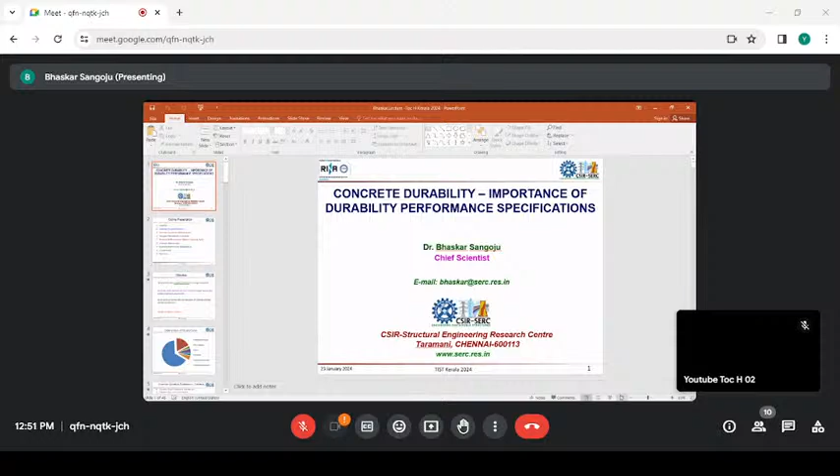Please put full screen. Slideshow. This is full screen. Sir, in slideshow mode, please click on view option.

Sir, near that home, in that row, last one view. Yes, sir, okay, slideshow. Slideshow from beginning, sir, from beginning. Fine, yes sir, but now it's not in slideshow mode.

Can you click one? Can you please click one more from beginning? From beginning I clicked. Yes sir, not, so it is not in full screen. No sir.

View. Normal. No. Okay. Please click on slideshow only. Now I am just clicking fit to window. No, no, click. So here I am getting full slide, sir.

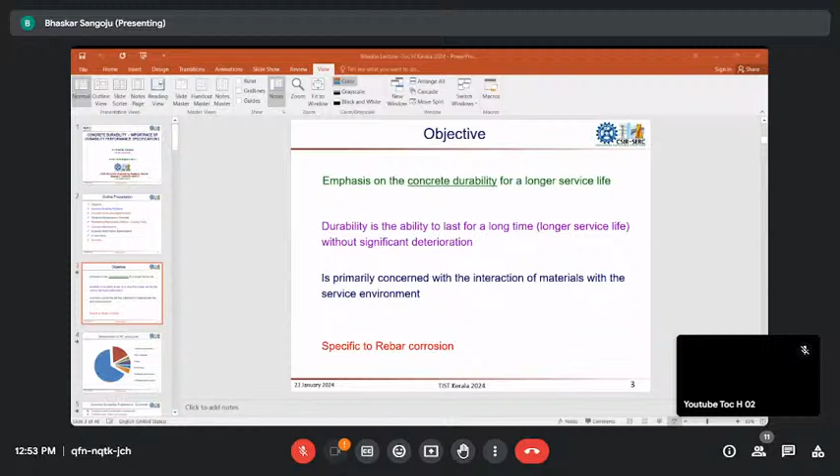Sir, in that orange row, that file home, insert, in that slideshow, from current slide, from current slide. Clicked, at least can you see the text? Yes sir. Now common durability problems in concrete. Yes sir, and now concrete construction specifications.

Yes sir, but then why it is not showing in full screen? On my system, it is showing full screen. Oh okay sir. Then I will log in once again. Maybe it's my phone problem.

I don't know. Pardon sir? For everyone it is like that only, ma'am. So what do you mean? You want me to continue this way or you want me to log out?

Actually you can do another, one more option is there. View, there is full slideshow, one option is there. Let Sahi ma'am come once again, I will tell, she will instruct you, sir.

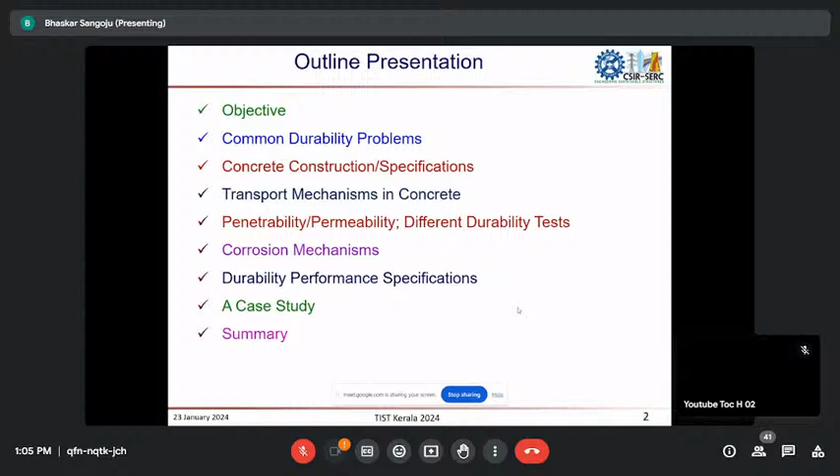Regarding durability performance specifications, as I mentioned, despite following some specifications and guidelines, we are not able to control the deterioration of concrete structures exposed to aggressive or surrounding environments. So we may need additional specifications to address durability issues, like quality control of cover concrete and required cover thickness. For that, I will show one case study, and finally I will summarize my presentation.

So the main objective is emphasis on concrete durability for a longer service life. We talk about durability and durable material many times; even in day-to-day life we use this word. So what exactly is the meaning of durability?

It is the ability of concrete to last for a longer time without significant deterioration. It is very common that deterioration happens when concrete is subjected to and interacts with the surrounding environment, but that deterioration should remain within certain limits till its design life.

That means without significant deterioration, the structure survives for its design life or intended life. That is what is durability.

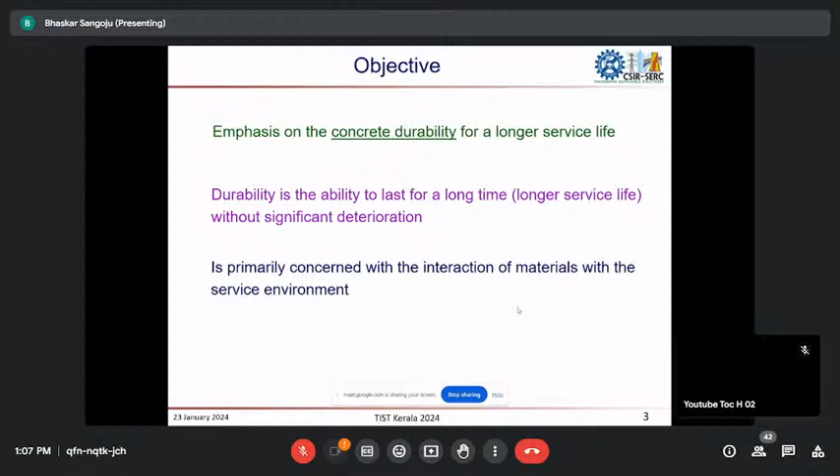Durability is primarily concerned with the interaction of materials, in particular concrete, with the surrounding service environment. Whether it is a carbonated environment, chloride environment, industrial environment, or a water retaining structure subjected to complete water exposure, that is the environment we should look into.

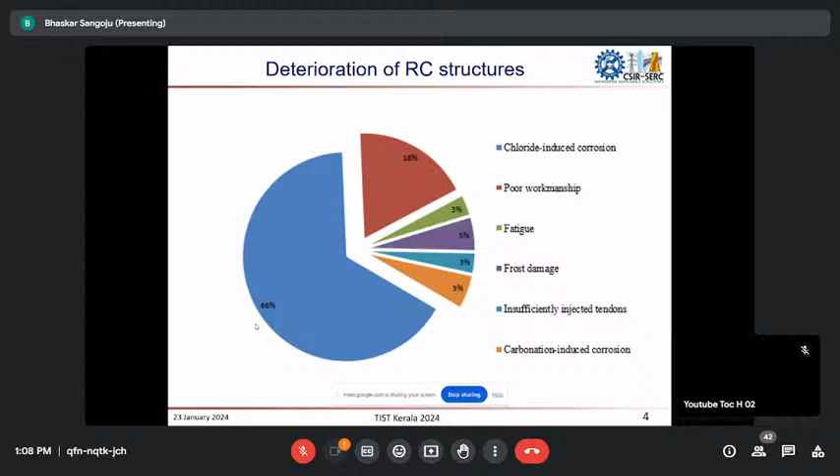My talk will be specific to rebar corrosion, because if you see this pie chart, most of the literature reports that especially in reinforced concrete structures, nearly 65 to 70% of structures deteriorate mainly from corrosion of rebars, whether chloride induced or carbonation induced. Though it is embedded inside the concrete, how does the rebar corrode? That is the main focus of this presentation.

These are some of the common durability problems: corrosion of steel in reinforced concrete, sulfate attack if the surrounding environment or groundwater contains sulfates causing the concrete to deteriorate, alkali aggregate reaction, and freeze-thaw cycle damage. These are some common durability issues when we talk about concrete.

But for all these durability problems, the deteriorating agent has to enter inside the concrete and react with the hydration products of concrete. That means it has to enter through the cover concrete, whether it is chloride, carbon dioxide, or sulfate—penetration of the deteriorating agents available in the outside environment.

In addition, the deterioration mechanism needs the presence of moisture or water. Most of the time, the presence of moisture is essential, whatever the deterioration—whether chloride induced corrosion, carbon dioxide induced corrosion, or sulfate attack. So the durability or penetrability of concrete plays an important role, which is why I use the word penetrability, penetration, or permeability. All these lead to the durability of concrete.

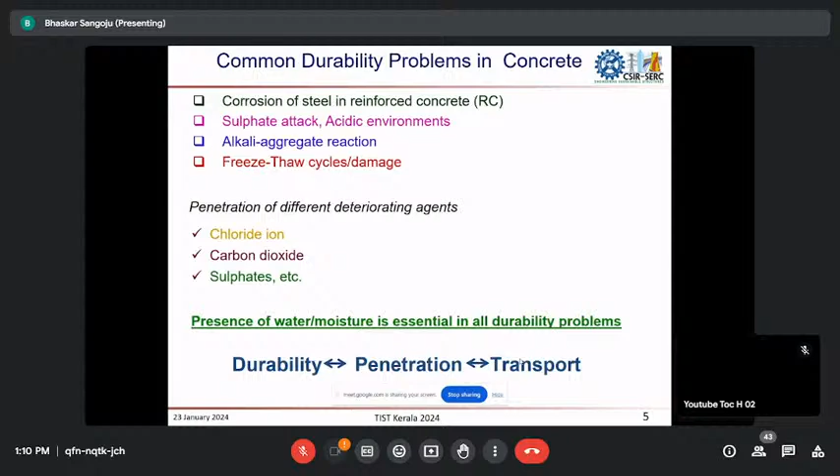The durability or penetration relates to the transport properties of concrete, particularly the transport properties of cover concrete, because that acts as a barrier to avoid entry of these deteriorating agents. But as of now, we follow design guidelines like IS 456 or design of concrete structures by limit state method, and some specifications—prescriptive specifications.

For example, water cement ratio you fix to keep the concrete of good quality and get the grade or strength of concrete you want. For durability issues, like shrinkage and temperature effects, minimum cement content and maximum water cement ratio, grade of concrete—we define and design the concrete as per these prescriptive specifications.

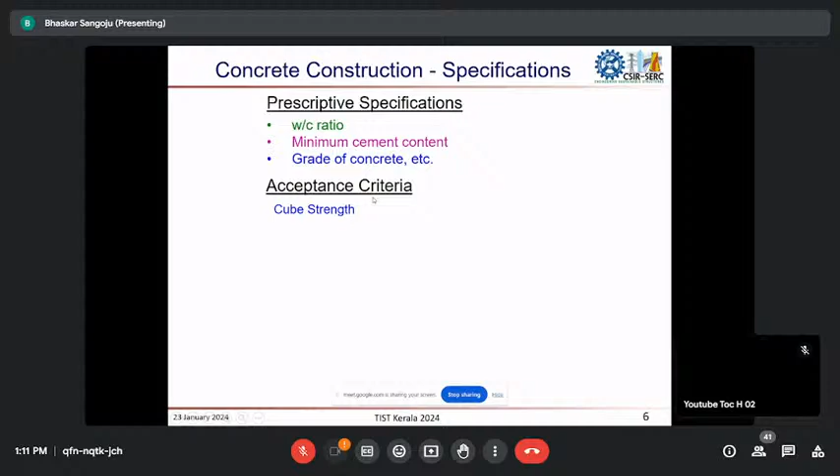At the end, what we follow as acceptance criteria is cube strength at 28 days, on standard cubes cast in the laboratory and cured for 28 days. Prior to that, during casting, we take utmost care for compaction, consolidation, and curing, and that we take as the acceptance criteria.

But is it truly representing the concrete available on the actual structure, the as-built concrete structure? That is where the gap comes in and durability issues arise. One of the main reasons for deterioration is inadequate acceptance criteria—cube strength alone is not sufficient. We may have to bring in other parameters to be followed and ensured either during mix design or after construction of the structure.

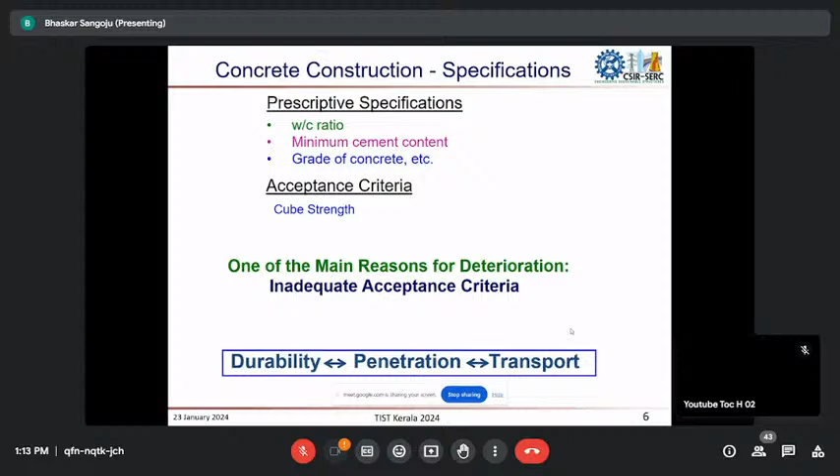Those parameters have to ensure the impermeability of concrete or the penetration resistance of the concrete, so the transport mechanism of concrete comes into picture. In addition to cube strength, we may have to bring one or two parameters which evaluate the transport properties of concrete. If we keep those transport parameters to a limit, that means the concrete should not exceed this limit, then it can perform well.

So before that, what are the transport mechanisms that we should know? Most of the deterioration mechanisms like carbonation, rebar corrosion, leaching, etc. are related to the ease with which the fluid or ion can move through the concrete. The primary mechanisms involved in fluid or ion movement are: one is capillary action, that is sorption.

As we know, many plants take water from the ground because of capillary action, so that is sorption. Next is fluid flow under pressure, that we call permeation. The third one is flow under a concentration gradient, we say that is diffusion.

Chemically, if the chloride concentration is more, for example, the chlorides try to move from a higher concentrated area to a lower concentrated area through diffusion. The fourth one is movement due to an applied electric field, this is migration, mostly the ionic flow or electron flow. Most of the time this mechanism is seen in laboratory experiments where we go for accelerated tests.

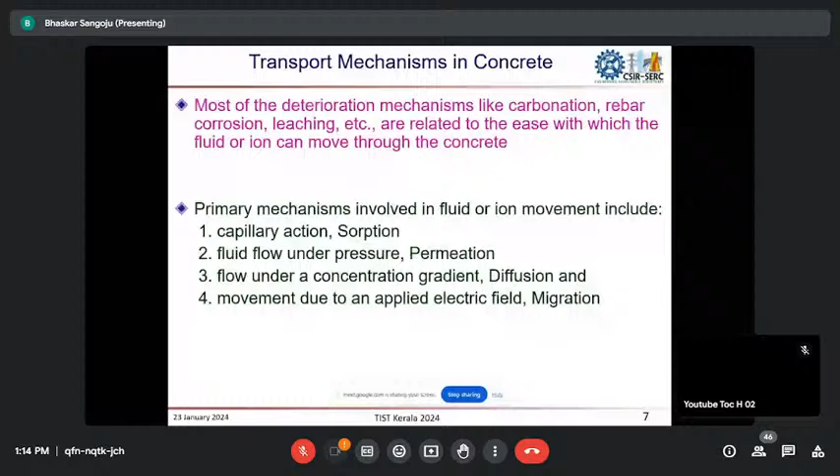Sorption refers to uptake of liquids into a solid by capillary suction. It is measured using parameters such as bulk absorption and sorptivity. There are some standard procedures available - maybe some of you have already started working on this in the laboratory.

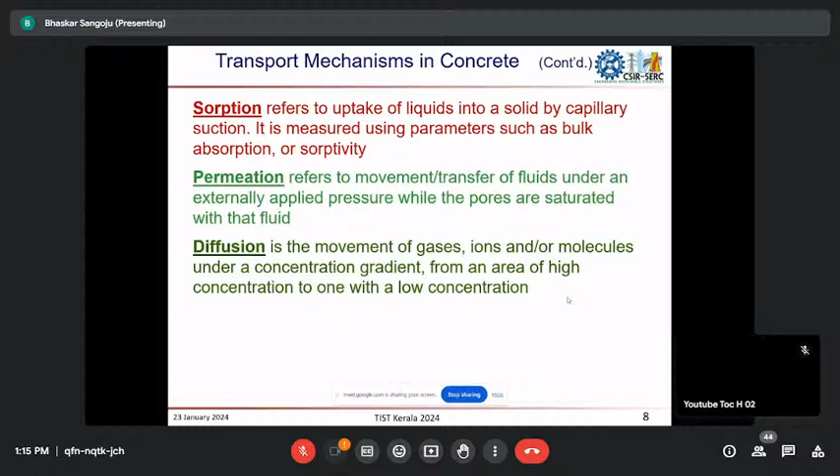Permeation refers to fluids moving under an external applied pressure, and diffusion is the movement of gases or ions under a concentration gradient from an area of high concentration to low concentration. Migration is as I already told. So essentially what we are looking for is to ensure impermeable concrete, impermeable cover concrete in particular.

So permeability is what we are going to measure. There are different durability tests. I'm just giving the list: for water penetrability, sorptivity test, water permeability test as per DIN 1048 and Germann. For chloride permeability, nowadays people are using the rapid chloride permeability test as per ASTM C1202, and the accelerated chloride migration test, which has two varieties - steady state and non-steady state, with Nordic standards available: NT Build 355, NT Build 492.

And bulk diffusion test - here the specimen is exposed to a pool of water for longer durations, and the other one is salt ponding test, exclusively for evaluating the chloride permeability of concrete.

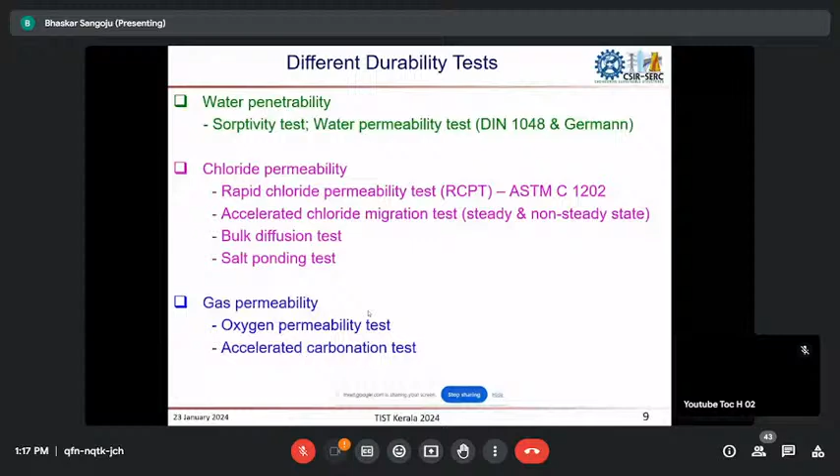Similarly for gas permeability, where you want to know the gas resistance of concrete - air resistance or oxygen - because for corrosion to initiate, the presence of oxygen is also important. If there is no oxygen, the corrosion reaction or corrosion progress will not take place. So to know the oxygen permeability of concrete or the carbonation diffusion coefficient, these two tests are being used.

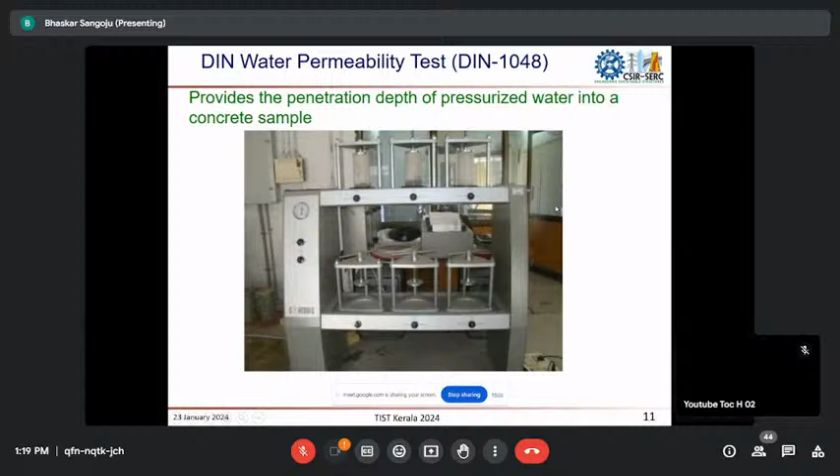You can see here the water pressure, and the specimen will be subjected to this water pressure for 72 hours. Once the test duration is over, the specimen will be taken out and split into two halves, and then we measure the penetration depth.

That gives the water penetration depth, which indirectly gives the permeability of concrete. So you can relatively evaluate the penetration depth of concrete. If the penetration depth is less, then we say that the concrete is less permeable.

This is another test, the Germann water permeability test. The advantage of this is it can be used on site also, whereas the previous two tests are normally performed in the laboratory. This is the setup, and it can be fixed either on a horizontal surface or vertical surface, and a constant pressure will be maintained on the surface.

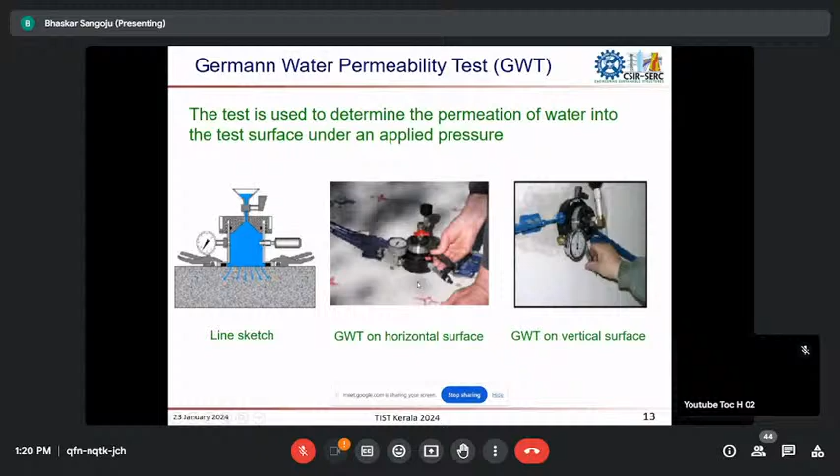The pressure loss, because of the permeation of water, will be adjusted using the micrometer screw, and based on that the flux or the water permeability rate will be calculated.

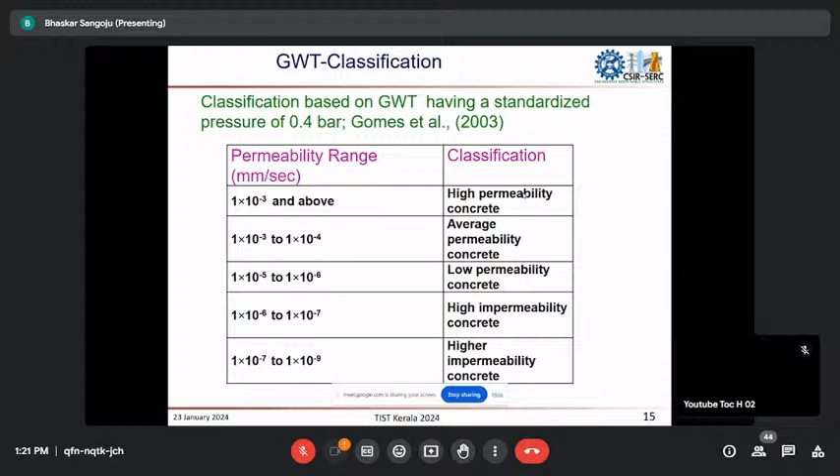This is the classification given or reported in the literature. If the permeability range is 1 into 10 power minus 3 and above, then it is said that the concrete is highly permeable. So all these tests are used to evaluate the relative performance in terms of ensuring the durability of concrete.

So in actual practice, we may have to use some of these durability tests while designing the concrete mix, as we do for evaluating the grades of different concretes. Here also, for the durability parameters, some classification we may have to give depending on our requirement, and then we try to evaluate these durability parameters.

A 15 mm depth is maintained for a duration of, say, 90 days or 60 days, whatever it is. But if the concrete has a very low water-cement ratio, then you have to expose it for more days. This is more similar to natural exposure conditions, so it takes more time for the chlorides to penetrate inside the concrete.

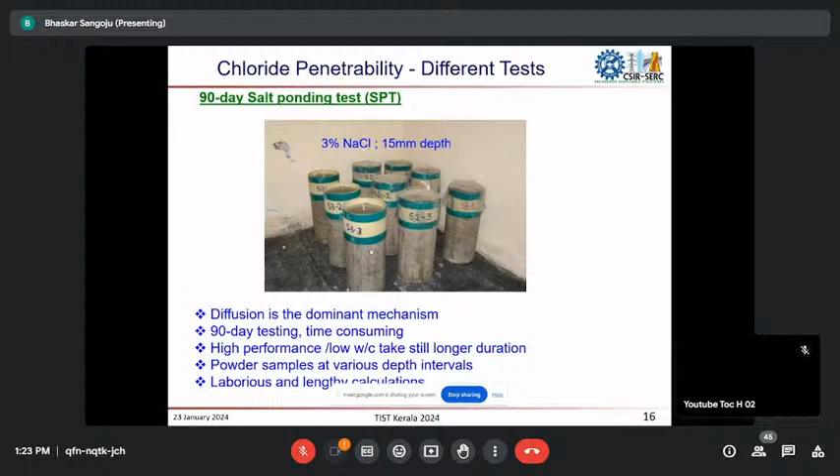High performance, low water-cement ratio concrete still takes more time for even a small amount of chlorides to enter the concrete, say 5 mm or 6 mm. Once the exposure period is over, we take the sample, clean the surface, and slice the top surface at different thicknesses, say 1 mm, 2 mm, 3 mm, depending on the requirement, to draw the chloride profile or evaluate the diffusion coefficient.

As I said, that takes more time for the permeation of chlorides inside the concrete. That is why an accelerated test, the rapid chloride permeability test, has come out. This is a 6-hour duration test, and this is the specimen setup: the concrete specimen placed between two reservoirs.

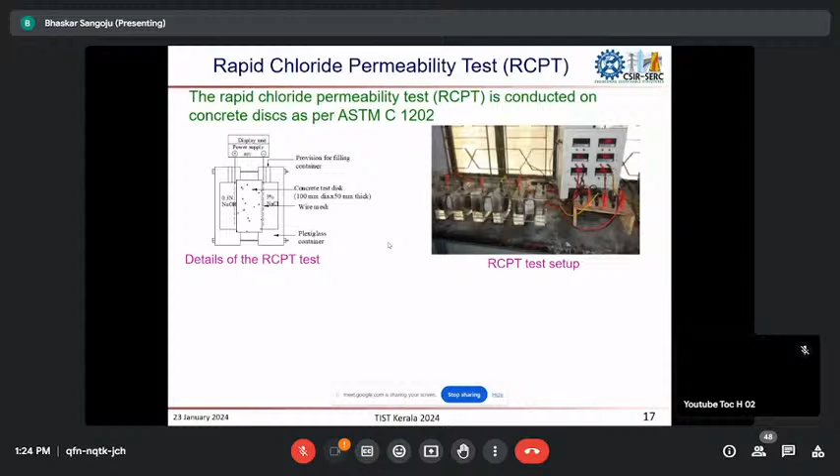One reservoir has 0.3 normality sodium hydroxide solution on one side, and 3% sodium chloride solution on the other side. Essentially, we impress a current so that the chloride ions try to move from one reservoir to the hydroxide reservoir. The chloride ions, being negative ions, try to move towards the positive side. We then find the amount of current passing, measured in terms of coulombs, ampere-seconds.

So this is the RCPT test setup. The total amount of charge passed is used to predict the chloride ion permeability.

The title says it is chloride ion permeability, but in concrete, because it is an accelerated test and we are impressing 60-volt current, sometimes the solution may get heated and the specimen also may get heated. So in addition to chloride ions, other ions available in the concrete pore solution also try to move and affect the total amount of charge passed. So strictly speaking, it is not only the chloride permeability test, it is just the amount of charge passed, because many other ions in the pore solution also contribute a little bit. Otherwise, for relative evaluations, we can very well use this RCPT test.

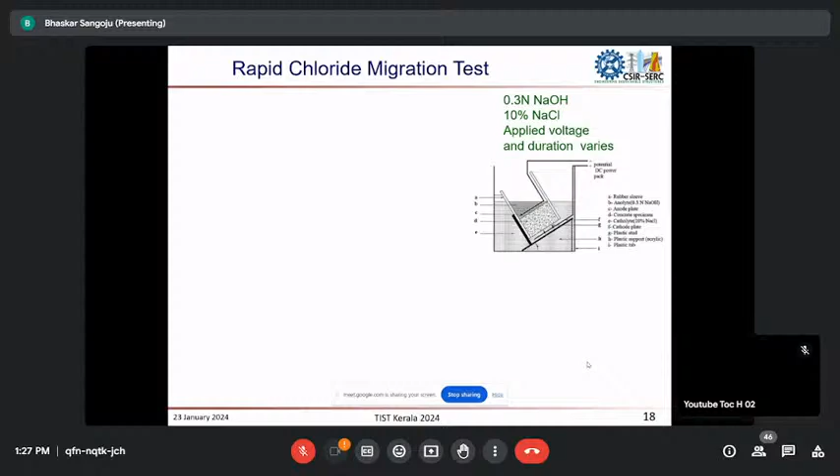Compared to the rapid chloride permeability test, the rapid chloride migration test is more reliable, because here we adjust the voltage with respect to the concrete property. So the voltage is not fixed and time duration also not fixed. Of course this is also an accelerated test, but we are not applying 60 volts here, whereas in RCPT we apply 60 volt current, so sometimes the specimen may get heated and other ions may try to move, affecting the total charge passed. That is not there here.

Also, if any chemical admixture is present in the concrete, this test gives a more reliable result compared to the previous RCPT test. That is why most researchers nowadays use the NT Build 492 test. The procedure here is similar.

This is the test specimen, 100 diameter by 50 thick, placed inside this inclined test setup. The inclination is intentionally created so that if the specimen is getting heated up, the air bubbles or whatever reaction takes place will be nullified.

Here the concrete resistance is being accounted for, so the applied voltage and test duration will be adjusted accordingly, and therefore the test results are less affected by the presence of admixtures.

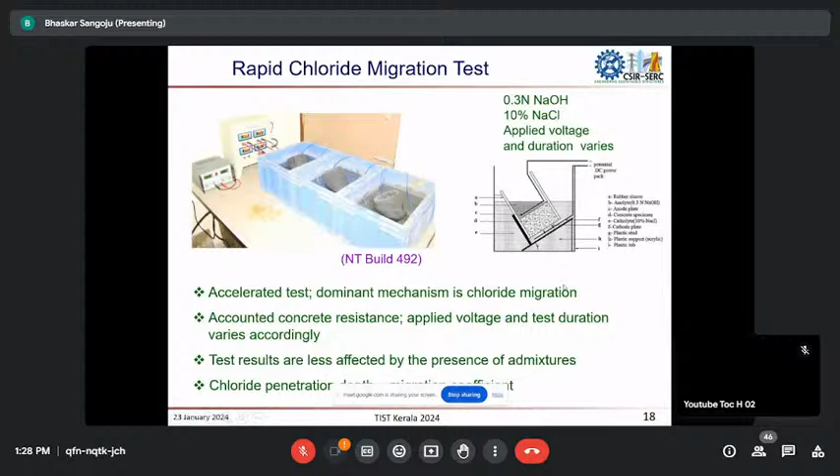Also, here we are not simply measuring the charge passed. Once the test duration is over, we take out the specimen, break it, and measure the chloride penetration depth alone. So this is more realistic compared to the RCPT.

The other one is the diffusion coefficient test. This is also similar to the RCPT test setup, but here we apply a very low voltage current, that is 12 volts. Depending on the concrete quality, this testing may take 2 days, 3 days, sometimes even 1 week, to get a reasonably good number of test points so that we can draw the diffusion line and based on that find the diffusion coefficient of the concrete.

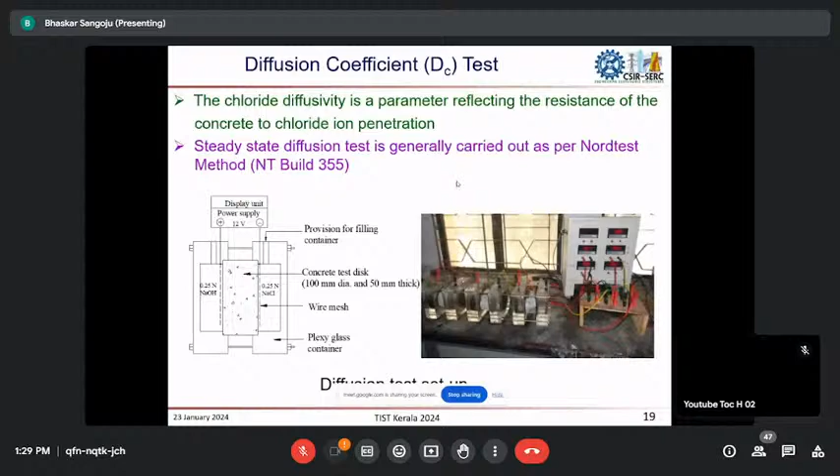Many researchers are using this diffusion coefficient as an important parameter in evaluating the service life, from the durability and corrosion deterioration point of view.

This is the oxygen permeability test, given by the South African standards. Here the oxygen permeability coefficient will be evaluated. This is a falling head permeameter test. The concrete sample is pressurized with oxygen to 100 kilopascal, and the pressure drop is monitored with time.

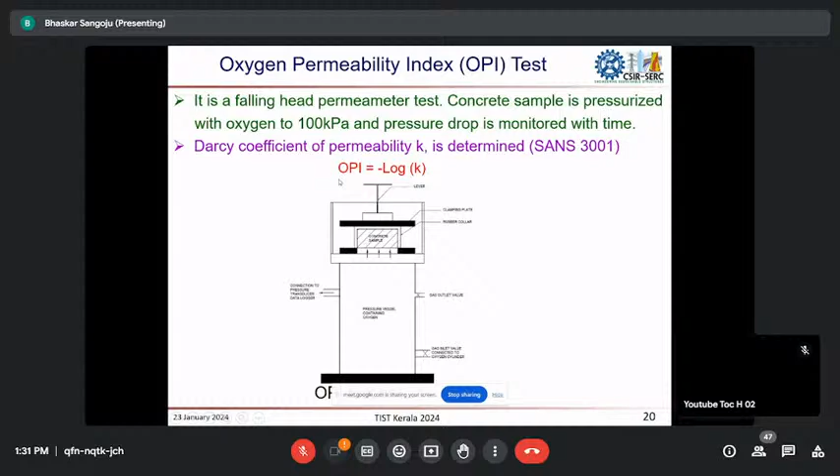This is the test setup, where the concrete specimen is placed. This is the pressure vessel containing oxygen, with an oxygen cylinder by the side. Oxygen is sent through the concrete sample, and we try to keep the pressure at 100 kilopascals. Because of the permeability and other factors, the pressure will get reduced, and that is taken into consideration to evaluate the oxygen permeability coefficient.

If we are aware of these tests, we give specifications for any big project or new construction, defining the grade of concrete in the design calculations, and we assume the concrete grade is achieved. But are we ensuring the grade of concrete on the as-built structure? That is very, very important.

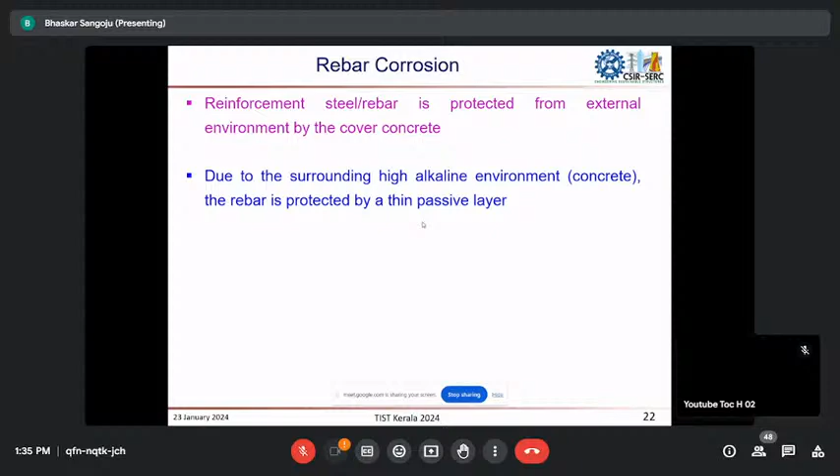The other protection is because the surrounding concrete is in a very high alkaline environment, the rebar will be protected by a thin passive layer formed over the reinforcement bar due to this high alkalinity. That layer protects the rebar from further corrosion.

But sometimes this passivation layer gets disturbed or damaged by a reduction in alkalinity due to carbonation or the presence of chloride ions, and then corrosion initiates. Corrosion is nothing but the interaction of the material with its surrounding environment. When concrete is exposed to aggressive environments, for example chlorides, the chlorides enter inside and damage this passive layer. Then corrosion initiates, and if the reaction is continuous, corrosion progresses.

To continue the reaction, as I said, I will show this in pictorial form as well—we need moisture and oxygen. So the parameters that influence the corrosion process are cover thickness, quality of concrete in the cover region (which is why we evaluate durability parameters), and the aggressiveness of the surrounding environment. These three are the major parameters that influence corrosion resistance performance.

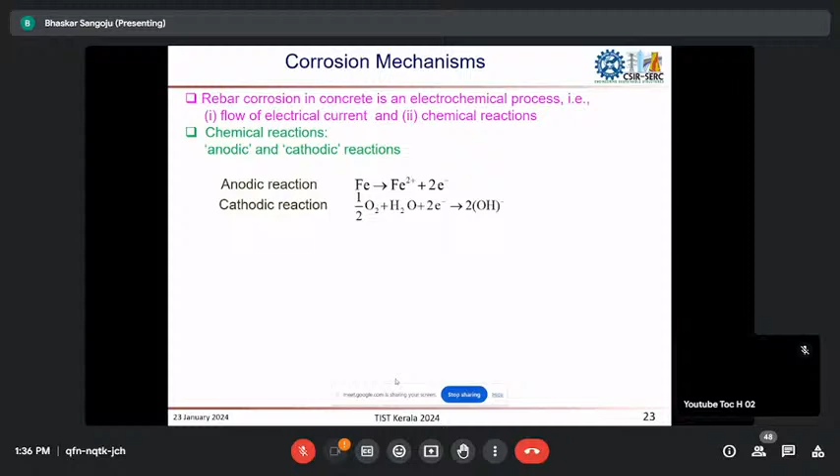So, the corrosion mechanism—as I said, rebar corrosion is an electrochemical process, meaning it involves the flow of electrical current and chemical reactions. These chemical reactions are anodic and cathodic reactions. At the anodic reaction, electrons are liberated, and at the cathodic reaction, that electron is consumed in the presence of oxygen and moisture.

And typical corrosion products, ferrous hydroxide, ferric hydroxide, and these products will again depend on the type of reinforcement bar and the surrounding environment, the aggressiveness of environment.

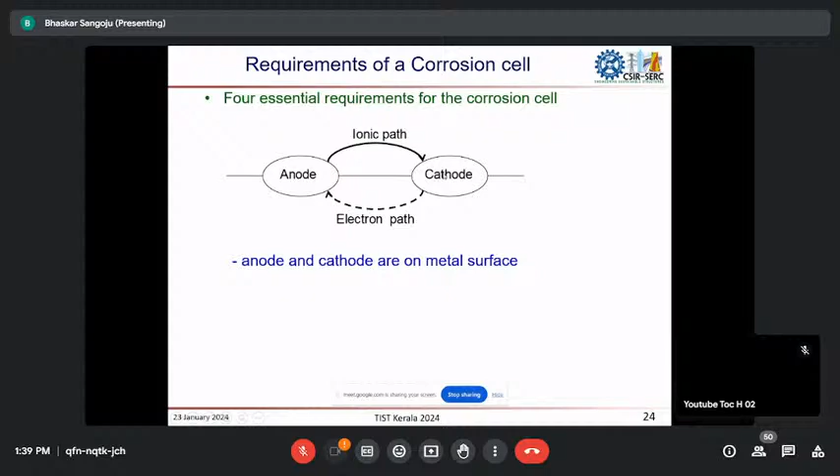Here, as I said, electrons and ions. Ions will be available in the pore water, whereas electrons means through the metal. So if there is a coupling or continuity or connectivity between anode and cathode, and presence of oxygen and moisture, the corrosion process will continue. Otherwise, there will not be any corrosion.

So that is why if we make the concrete more impermeable and there is no oxygen availability, we can very well protect the reinforced concrete structure from corrosion deterioration. Elimination of any of these four requirements stops the corrosion reaction, making the reinforcement bar better quality. That is why some people go for stainless steel, epoxy coated steel, and galvanized steel, thereby protecting the passive layer for longer durations.

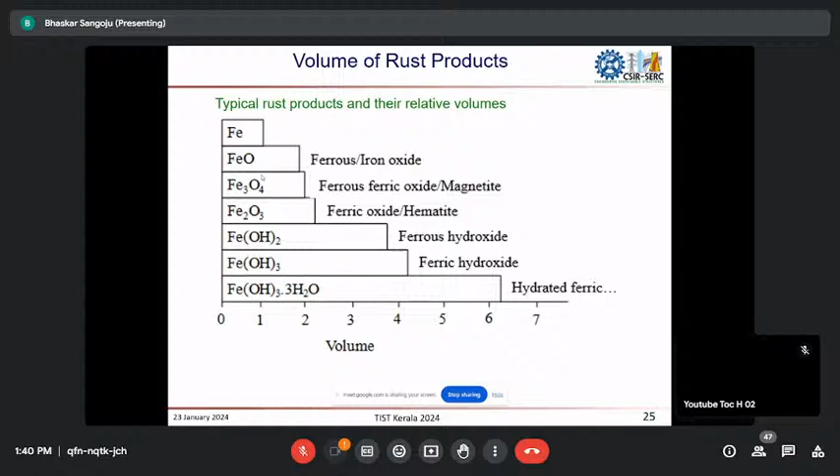And these are the rust products. Different rust products will have different volumes. Because of the increase in volume of the rust product, the rust tries to exert pressure on the outer concrete layer, thereby causing cracking, delamination, and spalling of concrete.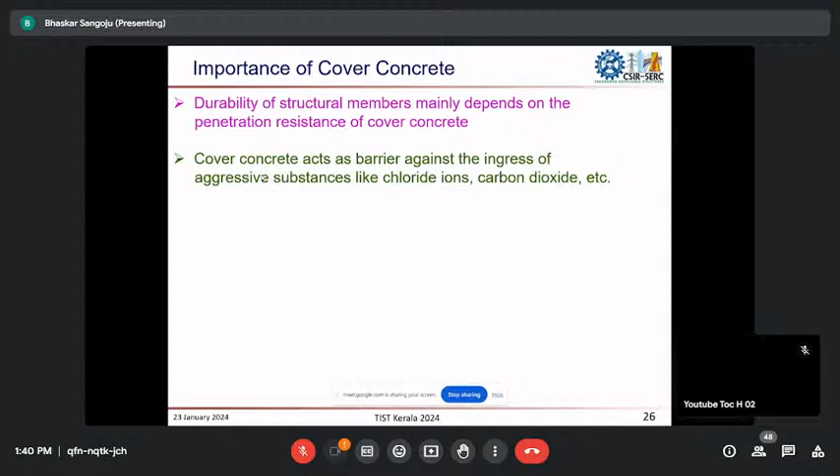So finally, you will see the exposure of rebar. That is why the cover concrete is very important for durability of the structural member, because it protects the reinforcement bar from the external environment, and also acts as a barrier so deteriorating agents cannot enter inside the concrete.

This can be seen in a simple line sketch, where the cover concrete plays a major role in protecting against outside deteriorating agents entering the core concrete. But from the design point of view, we essentially focus on the core concrete. By doing consolidation and compaction, we make sure the core concrete gains adequate strength, whereas the cover concrete we don't give that much importance. But from the durability point of view, we have to give equal importance to the cover concrete.

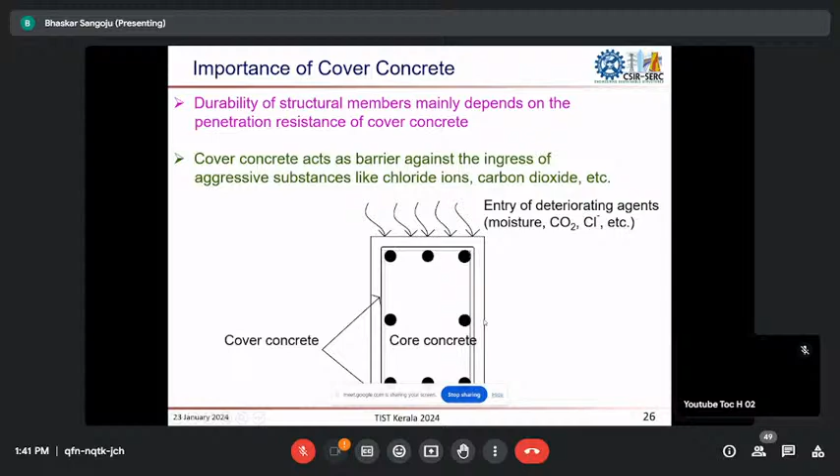To delay the cover corrosion process, you increase the cover thickness, but that increase cannot be without limit, because concrete is poor in tension. So whatever you provide as per the codal provision, make sure that the cover concrete is of good quality.

That is where the impermeability word comes into picture. If you make the concrete impermeable, indirectly you are increasing the resistivity of concrete from the electrochemical point of view. I'm talking about electrical resistivity because, as I said, corrosion is nothing but the flow of electrons and ions. So if we make the concrete impermeable, the ionic flow will get delayed.

So in this line sketch you can see the ions move from anode to cathode or vice versa through the concrete pore solution. If the pores are less interconnected, then the resistivity will be more, which means the permeability will be less.

As I said, the presence of oxygen and moisture is essential for corrosion to take place or continue. So if we make the concrete impermeable, we can take care of all these things, increasing the resistivity of concrete and minimizing the entry of deteriorating agents like chlorides or carbon dioxide, or the entry of oxygen and moisture.

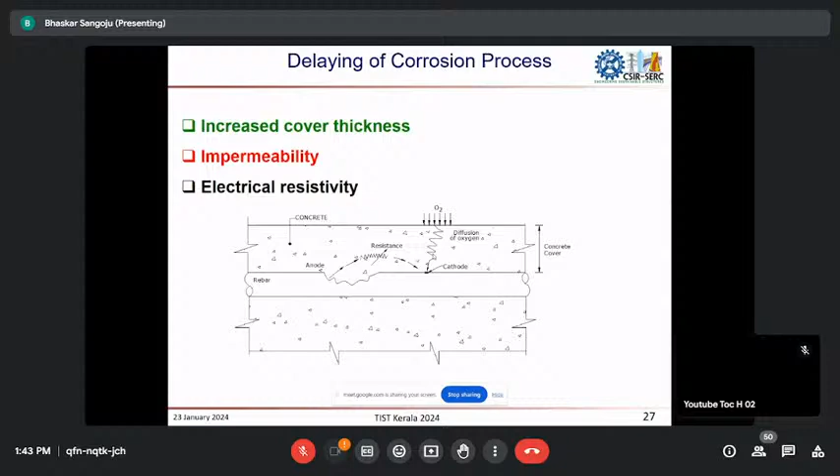So there are two major corrosion mechanisms: one is carbonation induced corrosion, the other is chloride induced corrosion. In carbonation induced corrosion, the outside carbon dioxide reacts with the water available in the concrete pores and becomes carbonic acid. So if we make the concrete impermeable with fewer voids, the water will not be available, whatever is required for the reaction or formation of carbonic acid.

So once the carbonic acid forms, that carbonic acid reacts with calcium hydroxide that is available as hydration products and then develops calcium carbonate, because this calcium carbonate is acidic in nature. Okay, and then the pH of the concrete will come down. Many of you may be knowing that concrete is a very alkaline material, very high alkaline.

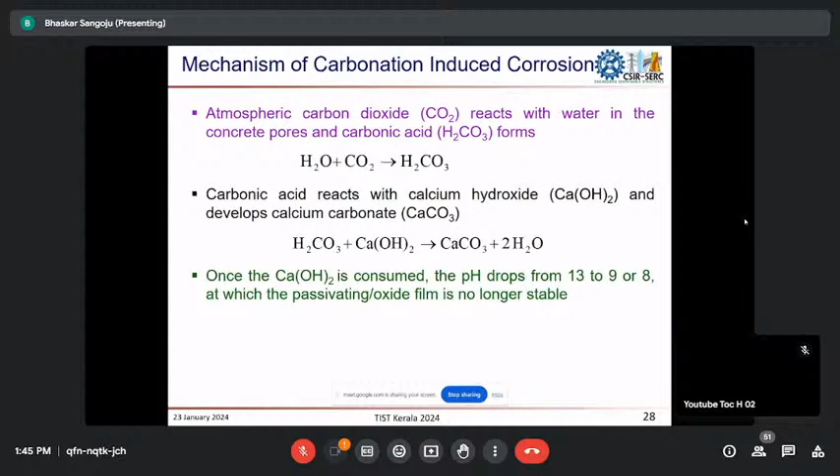So because of this carbonation, its pH will come down. So when it drops to 9 and below, then the passive layer, what I told earlier, will become destabilized, depassivated, and it will no longer be available for protection of the rebar. So this is the phenomena of carbonation induced corrosion.

That means when the concrete is exposed to industrial environment or carbon dioxide exposure conditions, the CO2 tries to enter inside the concrete and reacts with the concrete, and the pH drops down. You can see a more uniform type of rebar corrosion.

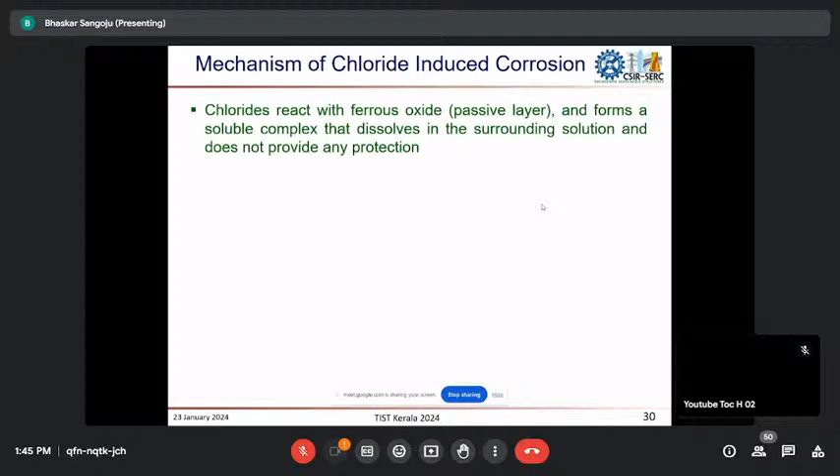But whereas in the case of chloride induced corrosion, it will not be like this. There, a pitting type localized corrosion we can see. So here in the chloride induced corrosion, this is the mechanism that is taking place.

So first chlorides react with ferrous oxide, that is the passive layer, and become ferrous chloride. This is soluble in pore solution. Then the passive layer will become unstable, depassivates, and corrosion of steel starts, and later formation of rust products.

So in the chloride-induced corrosion, it is more localized. Wherever the concentration of chlorides is more, there the rebar will get corroded. So it is more localized, pitting type.

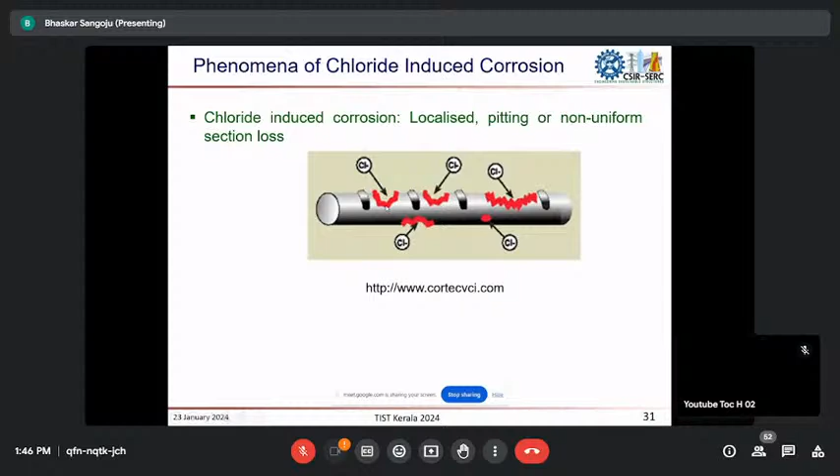Okay, so having known these things, again I'm going back to the specifications. So why is the corrosion taking place? Why are these deteriorating mechanisms coming or taking place in the concrete? Mainly because of inadequate acceptance criteria that we are adopting as of now.

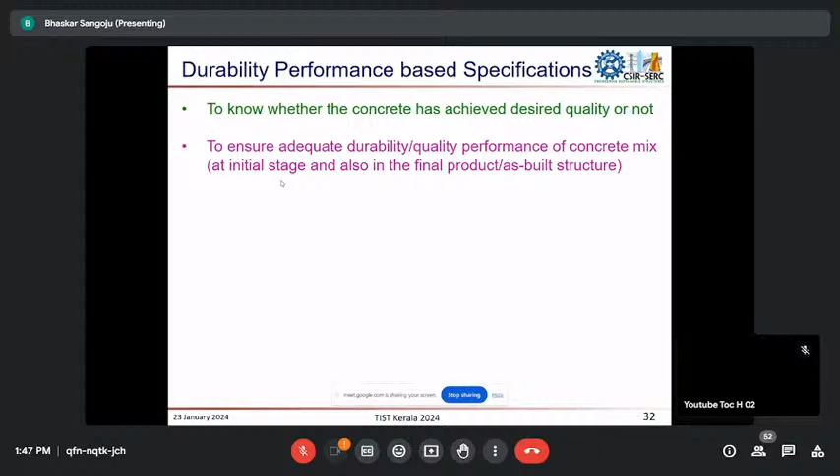So, in addition to the strength, we should be able to know whether the concrete has achieved the desired quality or not. Strength is fine. We were assuming that once we ensure the strength, it takes care of other parameters like concrete quality and others, but it is not directly related because of the things we are practicing at site. Because many times we don't maintain good cover concrete, and there will be a lot of constraints for why we are not maintaining it. When we talk to the site engineer, he will tell a lot of things.

Okay, but at least if we are aware that durability is mainly about restricting the entry of outside agents, and that can be restricted by making the cover concrete of better quality and adequate thickness, then at least we will take some care. So these performance-based specifications will come in to ensure adequate quality performance of the concrete mix.

So this can be taken care of during the initial mix design also. That means, in addition to strength, some durability parameters need to be considered during the selection of a particular mix for specific exposure conditions. Because for all the durability issues, we have to take into account what is the surrounding environment that the structure is going to be exposed to, whether it is chloride induced corrosion.

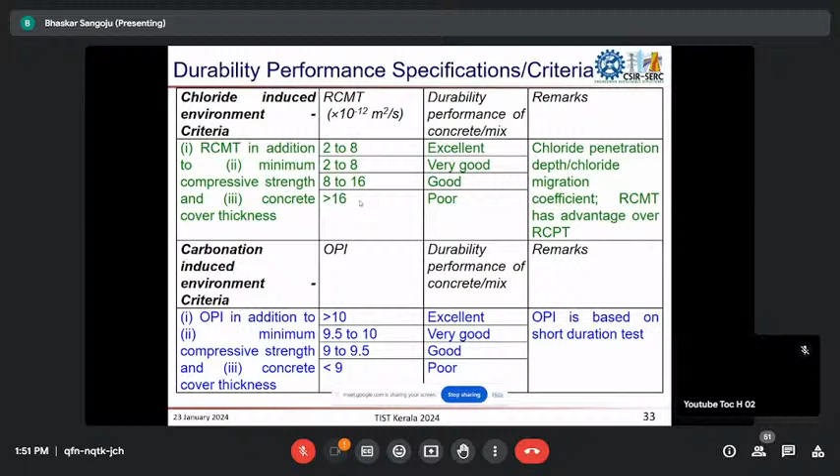What is the cover thickness? I check the design drawings against what is available on site. If the cover thickness is not as per the design requirement, similar to before, we have to give some classification, and based on that we can instruct the contractor to take appropriate measures to address the inadequate cover thickness and the quality of concrete.

We may ask the contractor to apply protective coatings if adequate cover thickness is not maintained as per our specification or design document. To understand this better, I'll give a case study - I think this will take about 5 minutes. This is a precast RC box units for a road under bridge.

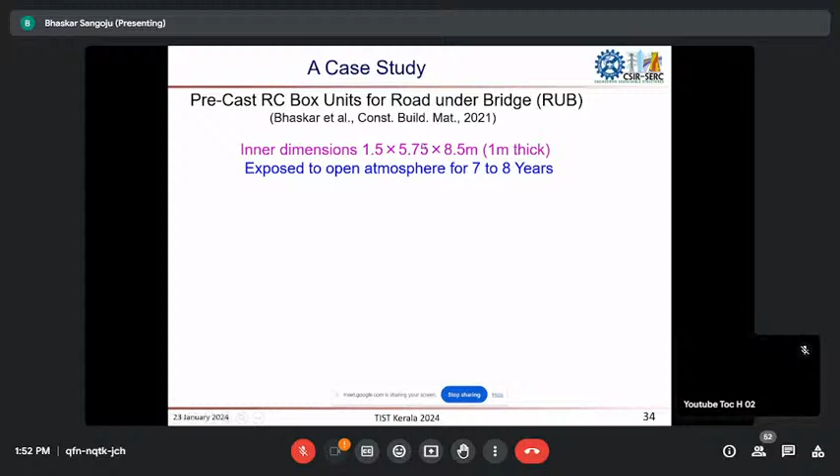One agency is the owner, and it asked to get the box units - reinforced concrete box units - for a road under bridge. This is the dimension of the box unit, and this is the photograph you can see. So this is the box unit. If they connect all around 12 box units, that should be sufficient to pass through the road under bridge.

So what happened is the contractor constructed these box units, and in between there was some dispute between the owner and the contractor, and the road under bridge could not get completed on time. The box units were exposed on site, and later the owner wanted to reuse these RC box units for construction. From the design drawings, the cover thickness required is 75mm because the exposure environment is aggressive - it is both marine and industrial environment.

When we went for thorough investigation - the agency came to CSIR-SERC and requested an opinion, because the box units had been laid there for 7 to 8 years or more - whether we can use these box units or not.

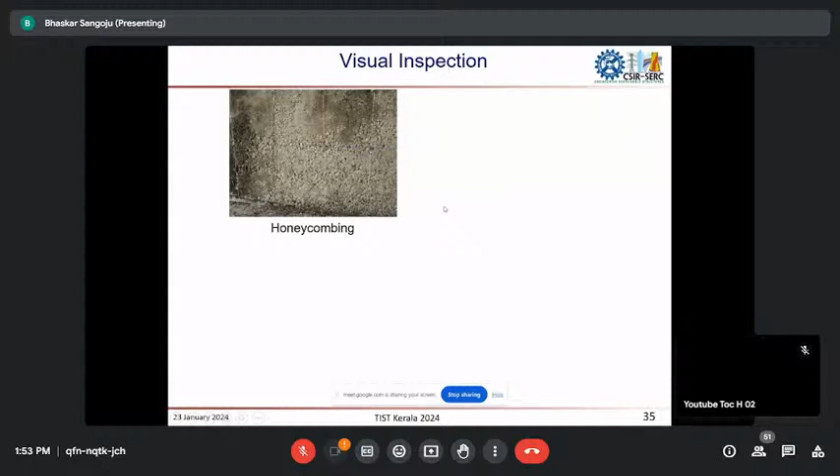So we did a detailed investigation, and these are some visual observations. You can see a lot of honeycombs, and the agency told us they had ensured the strength of concrete as per the design requirement. So a lot of honeycombing - in some places rebars get exposed, and some places we observed cracking.

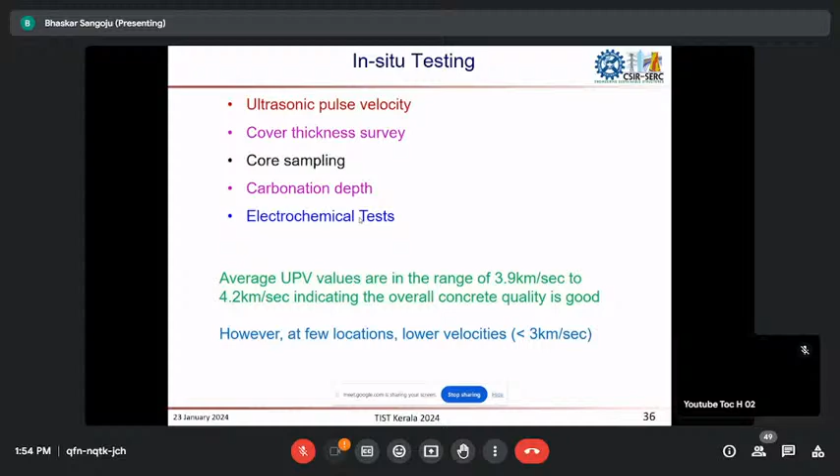We also did non-destructive testing - ultrasonic pulse velocity, cover thickness survey, core sampling, carbonation depth - and we confirmed the concrete strength is passing as per the design drawings. The UPV values in some places are very low, and in most places it is giving good values, but at a few places the velocities are very low.

As we know, when the reinforcement is not protected adequately, corrosion will initiate very, very soon. This is what we observed. Though we follow the existing codal specifications, the code only says provide adequate cover thickness, but how to ensure that is not specified - we are not ensuring it on site. So these durability parameters, this durability performance criteria, will try to bridge that gap.

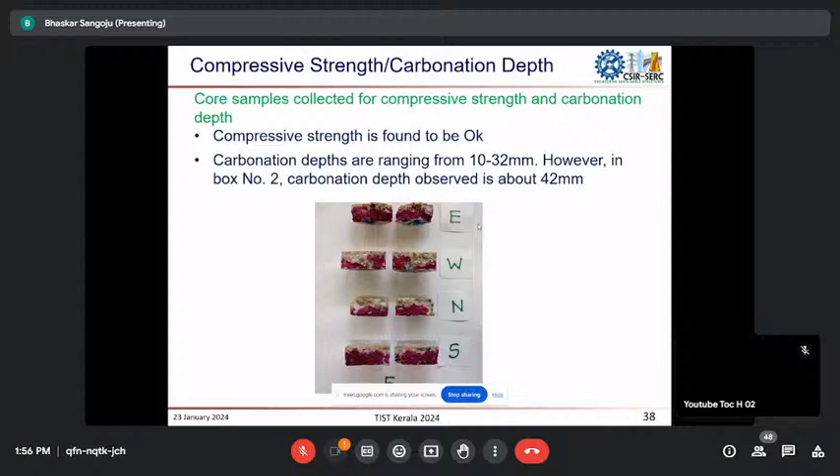As I said, compressive strength found is okay, and we evaluated carbonation depth. Because of the voids, honeycombs, poor quality, and inadequate cover thickness, carbonation entered inside the concrete, reaching up to 32mm in some places. Where the cover thickness is very low, corrosion had already initiated and cracking started along the reinforcement bar. That is where the importance of cover thickness and its quality comes in.

So these are the observations: there are some voids and honeycombs, and also inadequate cover thickness. Because of the variability in concrete quality, the UPV values have varied, and rebar corrosion was observed in some places where the cover thickness is very, very low.

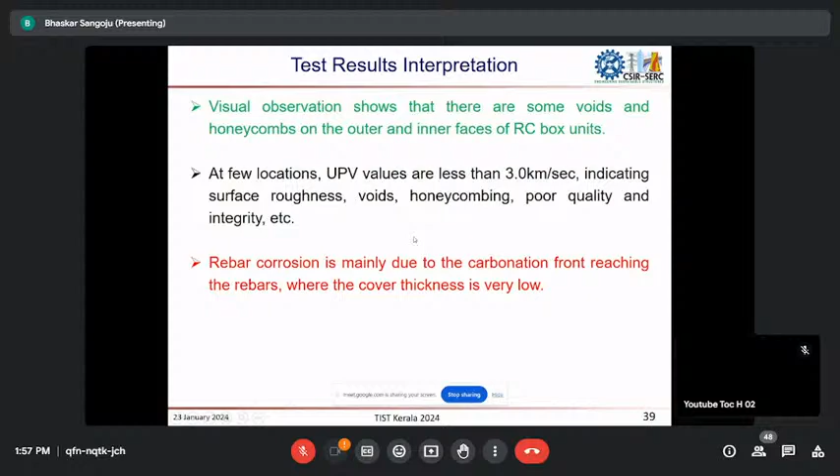So this study emphasizes the importance of concrete cover thickness for corrosion protection of rebars. Based on these tests, we recommended that RC box units can be used, provided some precautions are taken where cover thickness is very less and where honeycomb voids are present. There, they have to go for protective concrete coatings, which act as a barrier for the entry of moisture and oxygen.

As I mentioned earlier, some criteria are given, but in some places people will not allow us to take concrete samples from the structure. They simply say no, for RCPT we have to extract a core sample, even for RCMT we have to extract a core sample, or even to evaluate concrete strength we have to extract a core sample.

But sometimes it is not possible to take samples from the actual structure because it will cause minor local destruction and bad appearance. So there you may have to go for fully non-destructive tests, where you can use cover thickness as one parameter and ultrasonic pulse velocity as another. Rebound hammer can also be used, but if you want to ensure the integrity and quality of concrete, it is better to use the UPV test.

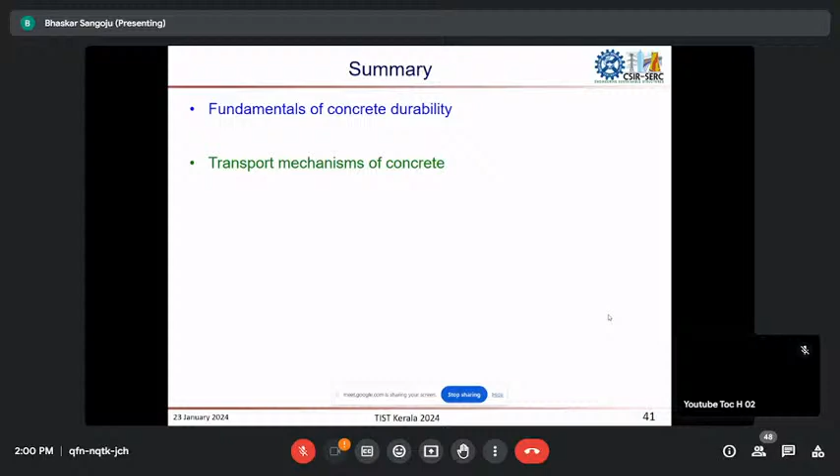With this, I will close my presentation. What I discussed is the fundamentals of concrete durability, transport mechanisms of concrete, different durability tests and parameters, corrosion mechanisms and corrosion control measures, durability performance specifications, and a case study emphasizing the importance of durability specifications. With this, I will close my talk, and I'm happy to take one or two questions. Thank you.

Chris, you may please ask. So was my presentation okay? Did you find any audio problem? Audio or video? No sir, it was quite good and audible, no issues. I think I maintained the timeline also. Yes sir, absolutely.

Would anybody like to interact, any general questions? I have a simple question, sir. How much of these tests have been incorporated as mandatory in the codal provisions, sir?

Codal provisions have not come, but again, code means it is just a guideline only, it is not mandatory. But as an owner, when we are giving our tender document, tender specifications, there we have to bring it in. So for strength, we say it should be M40 grade concrete, but whether it is cube-based strength evaluation or on-site as-built core-based structure evaluation, if we mention that clearly, then 50% of the problem is solved. That means both owner and contractor are responsible, it is not only to blame the contractor. What we want should be clear, and what we have to get from the contractor should also be clear, so the contractor knows as well.

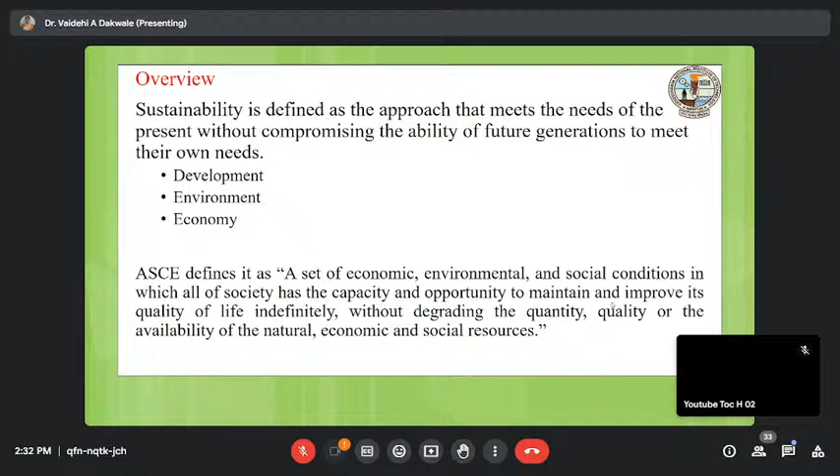You have already consumed the resources, and now your lifestyle is set to such a particular stage that without energy you cannot do anything, and that is why energy equals to emission. So it means if you try to become sustainable in this society, you are supposed to put the social conditions as well, but without degrading the quality of availability of natural, economic, and social resources. So this is the definition.

We will look into the sustainable construction materials with this point of view. What is a need? The need is that my future population is going to use it judiciously. And the need is that the population is increasing, and so is the consumption. The rate of increase of population and the rate of increase of consumption of resources are not the same, it is not one on one.

The rate of increase of population is lesser than the rate of increase of consumption of resources. So we have a lifestyle, or a certain type of work, where we consume more resources compared to our ancestors. In the past 50 years we have grown around 5 times, which is a much greater rate than forecast, and the consumption rate of resources is much greater too.

From where we are taking our resources - all resources, may it be construction materials, energy, food, water, or land resources - everything we are taking from the earth.

That is why we are now trying to find a suitable place to live rather than earth. We are trying to move to the moon, and trying to find out whether the moon supports us for living, so that we can leave the earth and live on the moon, making earth no more sustainable.

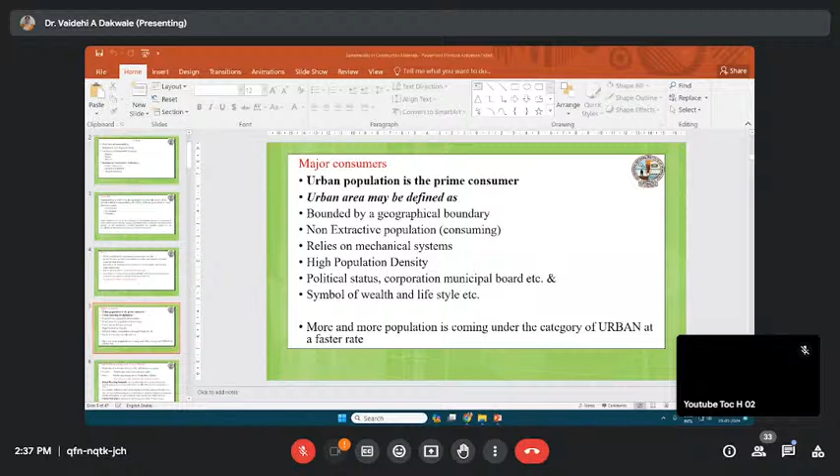So I was asking you, if my village grows and becomes urban, is it always possible that it becomes sustainable and urban? Growing urban population does not mean rural people are migrating to urban areas. On the contrary, it can also mean rural areas are developing, more mechanization and industrialization is happening, and that population now comes under the urban body. Because they have adopted an urban lifestyle, their consumption of resources will increase. Is that correct?

Yes ma'am. Okay, now you may think we were supposed to talk on sustainable construction material. Why this particular point was taken up is that sustainable construction material is not a very innovative or new material. It is an approach to a material from the sustainable point of view. So if you say a certain material is sustainable, it should be sustainable throughout its whole life, the life cycle sustainability has to be there.

If we don't bother about it, Earth will balance all this energy and these disturbances on its own. There are some networks, some connections between life and the planetary system, some cycles that the Earth has decided will be there. Now we say plastic is a non-degradable type of material, it is non-sustainable and we cannot use it. But there are researches showing you can use plastic to generate fuel, to power some process. It means it has some utilization on the earth, right?

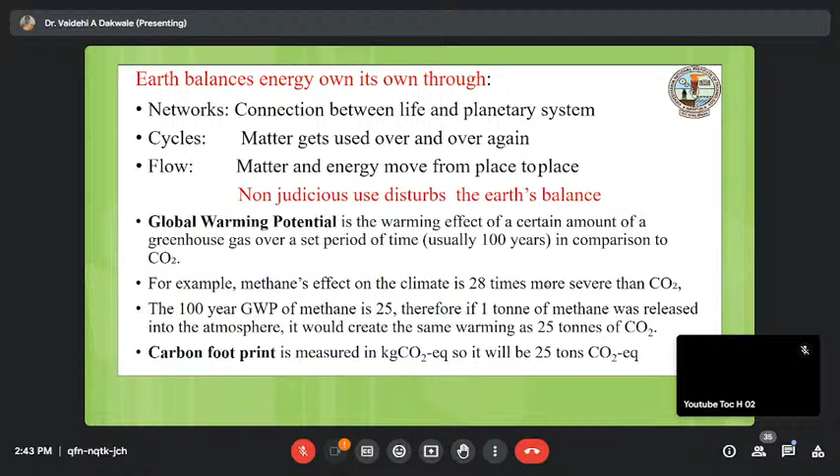So that is how we are supposed to perceive this approach to sustainability - it was different before, but now that we are going into bigger research into this, the approach should change. I hope at the end of this session all of you know what sustainable construction materials are. I'm not going to talk about insulation materials and fly ash based or mineral admixtures.

This is all known to us. Everywhere this information is available, including what's given in these slides. The only thing I want to highlight today is your point of view should change to look at a sustainable construction material. Now, what is the ecological footprint if we try to find out biocapacity deficit, biocapacity reserve?

I was just telling you that the rate of consumption of resources should be equal to the rate of production of resources by earth. If that rate is not matching, we are bound to use crusher dust, we are bound to use manufactured sand, because natural sand is not available to us. So in that case, I cannot call crusher dust or manufactured sand a sustainable construction material. It is not. I am bound to use it because the rate of consumption of natural sand was very high as compared to the rate of production or formation of that natural sand in the riverbed. So I'm bound to use it.

Now, it may be costly for me, it may be a non-sustainable processed material for me, right? But I will try that whatever reserves of natural sand are there, they are preserved and not disturbed.

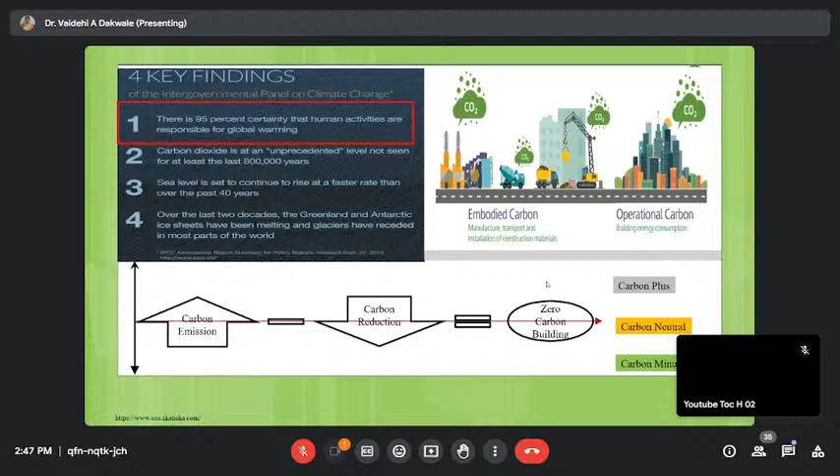So there is emission, there is reduction, there is zero carbon. If there is zero carbon, we call that material or building carbon neutral. If it is more, then we call it carbon plus. And if it's sequestering the carbon, absorbing it by some particular means, then we call it carbon minus.

So there is a systematic approach to achieve all these things. Are you aware of sustainable development goals?

Have you seen this picture before? Any one of you? Yes, ma'am, we are aware about SDGs. Okay, can you tell me which particular SDG is related to the construction industry?

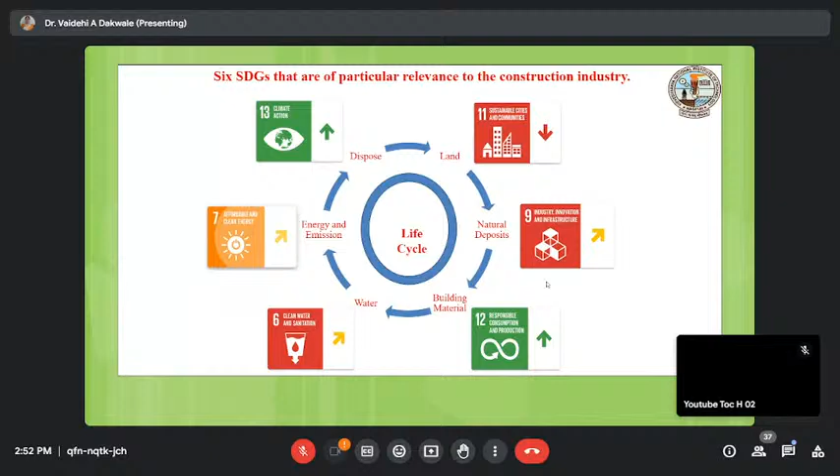Then clean water and sanitation, affordable and clean energy in the usage phase, and climate action—everything is related to one particular phase or step of the life of the building. This is the current scenario: you extract, you process, you assemble, and you waste.

Wastage cannot be eliminated, it can only be minimized. Every process, when there is a transformation of state or phase of the material, there will be certain waste. Now we know there is a law of energy conservation, but similarly there is no material conservation law—you are bound to waste something. The degree of sustainability you achieve directly depends on the degree of waste you minimize.

Okay, now what can I do for all these things? Raw material consumption is increasing and it will nearly double by 2060 under a business as usual scenario. Overall, if you look upon the commercial scenario, we are now of a mindset of use and throw. If you cannot give a material a good life, that material is not sustainable material.

I'll give you an example: if you are doing a false ceiling in your house, and the life of your structure is 60 years, ideally that false ceiling should also live for 60 years. You will maintain it properly, but it should live for 60 years. Now that is an insufficiency of material property, that you cannot design such a durable material for that particular purpose.

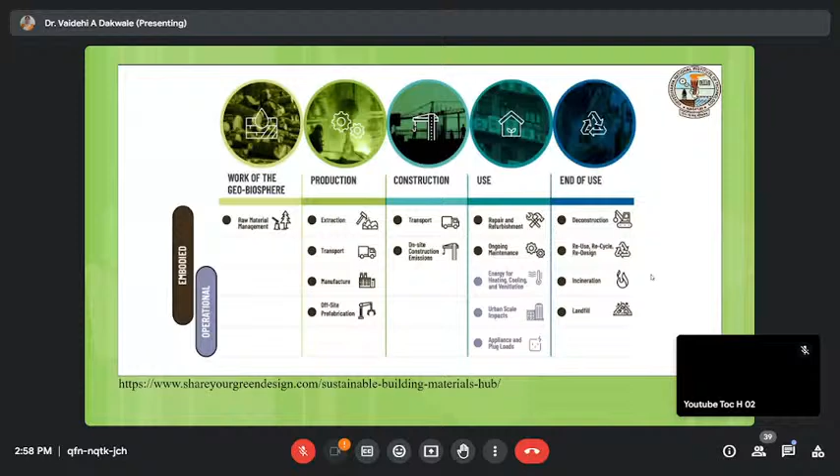So our concern is very high energy materials, high energy materials, medium energy materials, and low energy materials. If I look into very high energy material, the quantity of these materials which we use in construction is very, very less, so I'm not bothered much about it.

High energy material is where cement and steel come in, and the quantity we use is very, very high. Second is medium energy material, where all the types of blocks, masonry blocks, and concrete come in — medium energy material, but the quantity is very high, so we're concerned about it. Low energy materials are those where you need only extraction energy, like sand, you need only extraction and transportation energy, you don't have to synthesize it, but then the use is very high.

So for a sustainable construction, or to call that material a sustainable material, I'm supposed to look into the second, third, and fourth categories more judiciously. Okay, now come to the topic.

Everything has to follow a whole life cycle approach, and for this, nature is our guide. In nature, there is no waste - one material is food or raw material for another. We call this biomimicry, where a bigger organism consumes a smaller one, an even bigger one consumes that one, and the cycle continues.

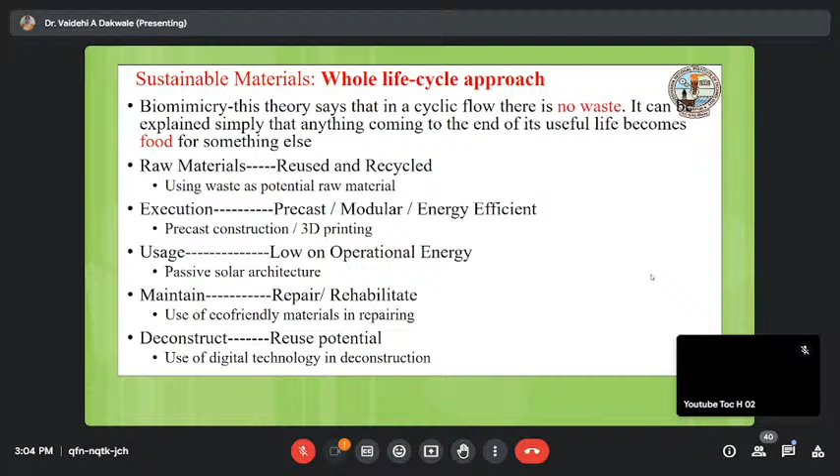So we have tried to touch each of these 5 stages - maybe the fifth is not completely done. Let us see one by one what the potential of each step is, what we can do.

Reusing waste as a potential raw material - can you tell me what are the characteristics of waste which can make it a potential sustainable material? What can you see on this slide?

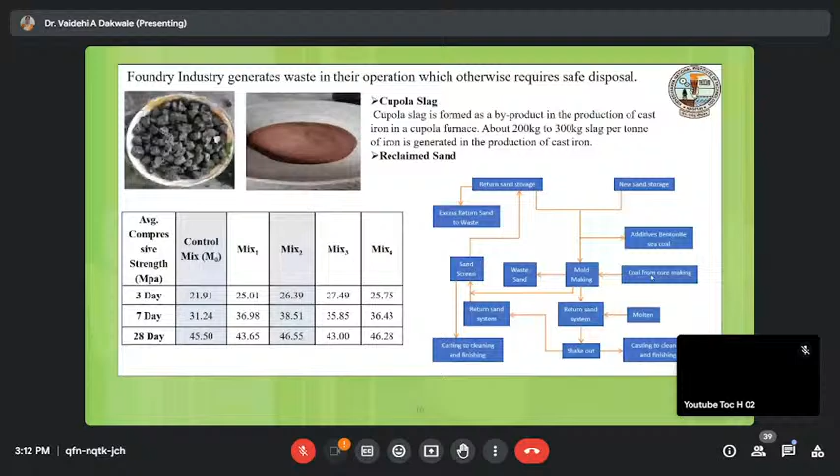The only point here was, as I told you earlier, the process of using the cupola was modified afterwards, and at the point of generation of that slag or waste, the process was modified and waste generation was minimized, so the cupola slag supply became non-sustainable. So whatever material was generated could be used, but this cannot be used for a long run for making concrete because there is no more material available with the industry now - they have changed their process. A similar scenario can occur for different types of industrial waste.

The next waste is construction and demolition waste. Nowadays we hear too much about this - everywhere people say natural aggregate is not available, so we'll go with construction and demolition waste instead. This is a global practice of utilizing C&D waste, and it becomes essential where there's no further supply of natural aggregate. But C&D waste utilization needs to be more sustainable through its process of production, because you require certain stages of production or processing for C&D waste to be utilized in making concrete.

Consider a building composed of masonry walls, concrete frame, aluminium, glass, some steel, structural steel, reinforced steel, etc. You separate all of these out, and once you demolish them, the mix you get has some part brick masonry, some part plaster mortar, some part stone, tiles, etc., and some part concrete. This mix is called recycled aggregate. It's a very heterogeneous composition of material, and therefore utilization of that material cannot be done as it is for reinforced concrete.

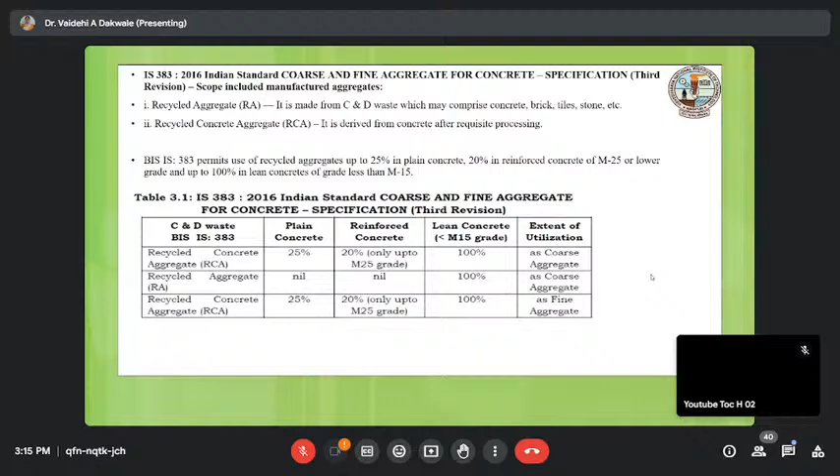Now let's see whether this material is actually a sustainable construction material. First point: if you're using it only up to M25 grade, you cannot use it in important types of components, as IS code suggests. Or if you want to use it in a component with a lower grade of concrete, you need to give more dimensions to that component, which generates a need to utilize more quantity of concrete in that construction.

Another question regarding the sustainability of this material is, if certain processing is required for the material, whether the end material will really be sustainable or not. If it is not, how can we call it sustainable? For what reason are we calling it sustainable?

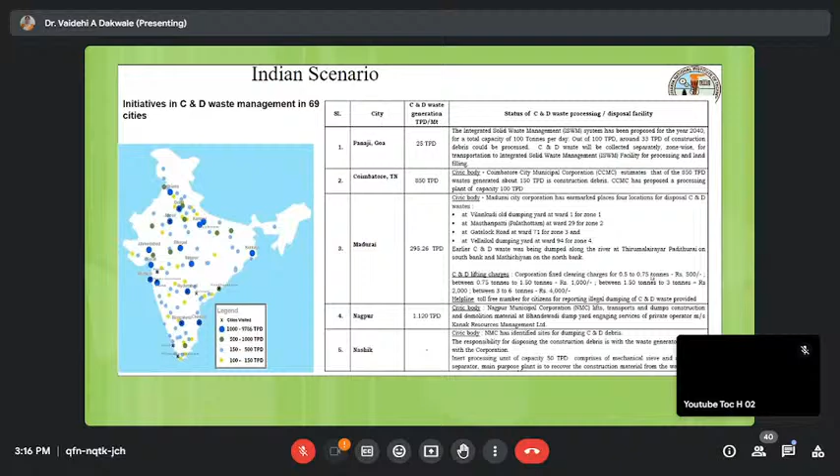This is the approximate quantity of generation of C&D waste everywhere. But in some particular cities, they have now started collecting this data. Maybe in the future we will have exact quantities or the potential of generation of C&D waste across regions. These are the sources.

The source decides what type of waste you will be getting, whether it will be RA or RCA. Separating out RA and RCA is very difficult.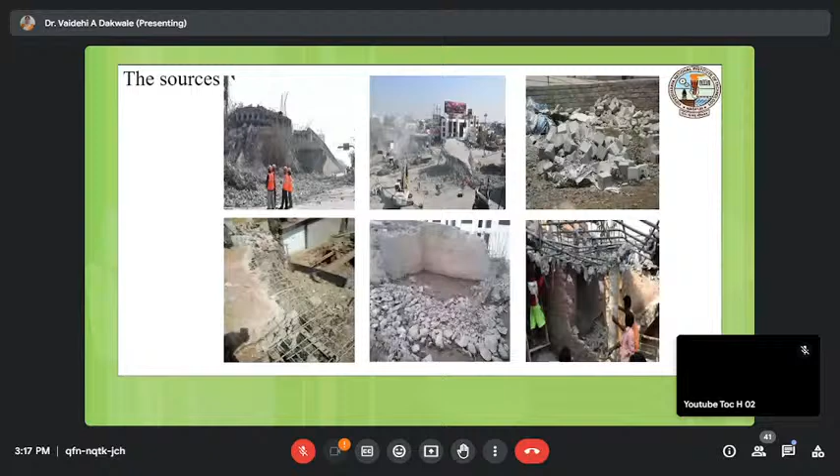So can we use that RA as an aggregate? Here we can see three types of aggregate used in one project: tile aggregate, concrete aggregate, and brick aggregate. Combined, they were used to make a building unit or primary building unit.

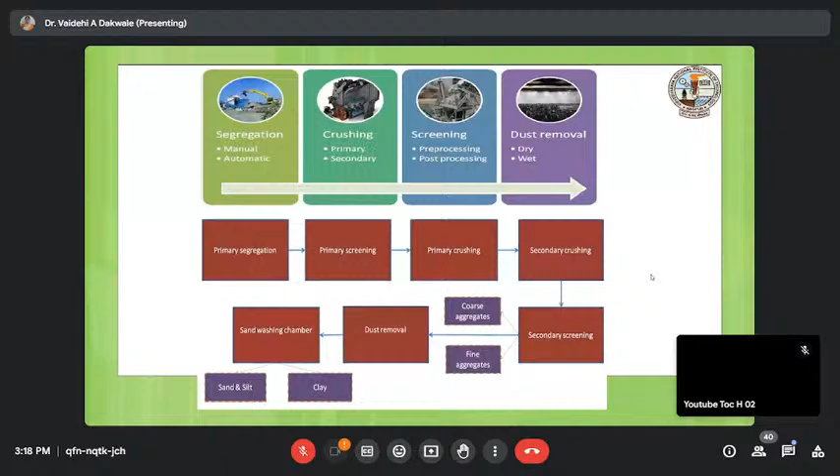These are the processes the demolition waste has to go through: segregation, crushing, screening, treatment, dust removal, and treatment - after that some chemical treatment, some mechanical treatment, and then you will be able to use it. If you use it without treating, you are not exploring the complete potential of that material, so you're just replacing natural aggregate with it. But if you are treating it, some energy will be required for that treatment.

This is the project of development of construction and demolition waste bricks, where recycled aggregate was used.

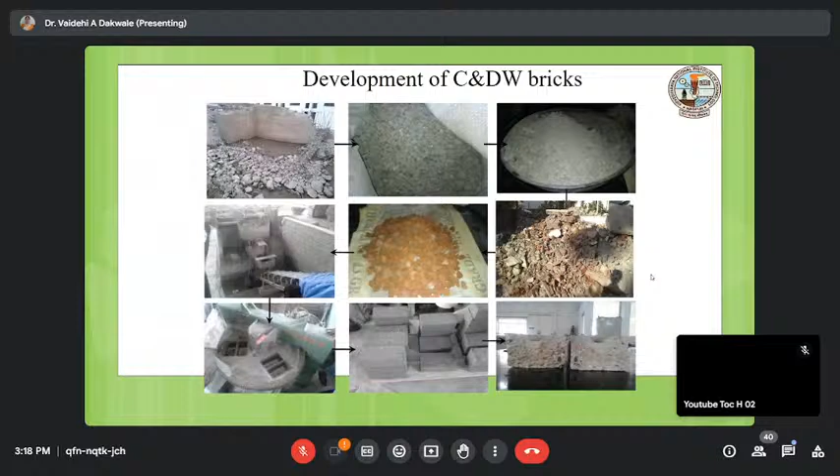Two types of bricks were produced: one was a hollow brick, another was a solid brick. Then the comparative analysis was done for hollow and solid bricks.

In the solid bricks also, there will be brick particles in the recycled aggregate, so the thermal conductivity of that particular brick will be lesser.

So if I want to call it a sustainable material, if the processing energy is more, what can I achieve? There are two components of that energy: one is the embodied energy, another is the operating energy. So if reprocessing of material requires more embodied energy, but operating energy can be saved by achieving thermal insulation, then I have balanced the sustainability requirement of that material compared to the natural material which is available outside.

The next example is execution, low energy in processing. We used some forestry and agricultural waste in building material, wherein we tried to prepare some panels out of bamboo and coir. Coconut coir was used as a fiber, and the bamboo was used as a continuous reinforcement and a filler material.

To call this material a sustainable construction material, if I am consuming it at a higher rate than the production, it makes the material non-sustainable. If my rate of consumption is lower than the production rate, then I can say I am using this material as a sustainable construction material.

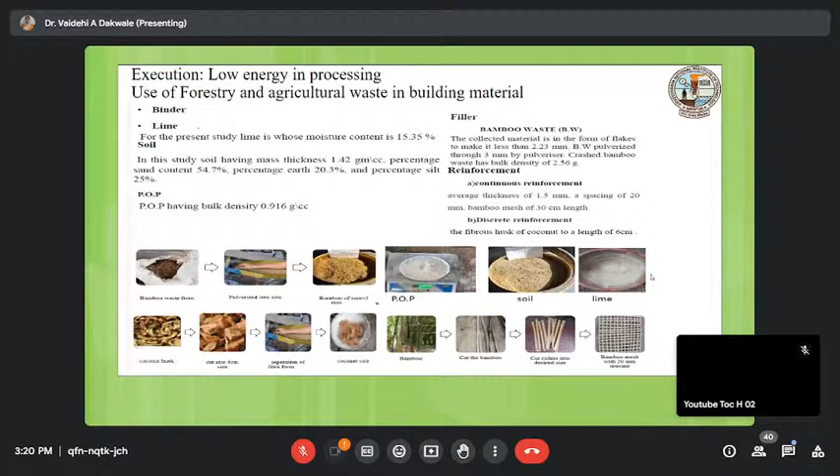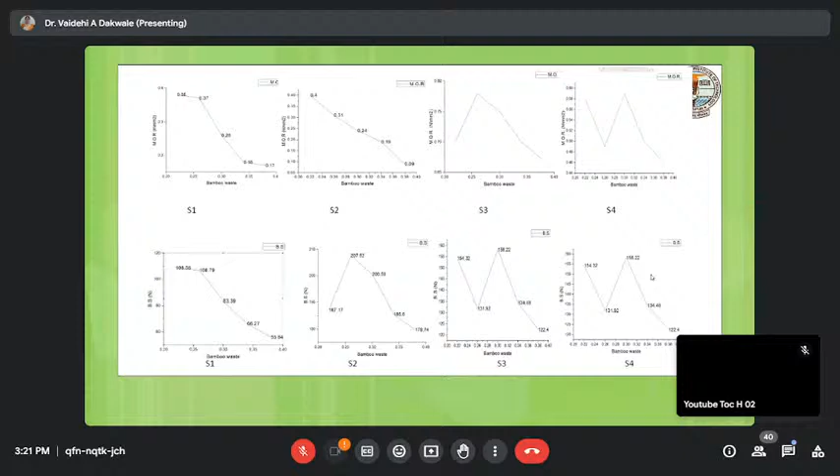Preliminary investigation was done on cubes for compressive strength, and after that the panel casting was done. For these panels, the MOR and breaking strength was investigated, and it was found that 28% of bamboo as a filler gives the maximum breaking strength.

The third point in sustainability of any construction material is if you can use a process which requires lesser energy. In precast, when you make pre-stressed precast panels, there is a requirement of vibration. So for small applications where you do not require huge mechanical strength, can we eliminate that particular energy required for vibration? Can we deploy a technology where without vibrating we can manufacture panels, and use those panels to construct small units?

This was a project taken up for a low cost precast toilet block with self compacting concrete, using self compacting concrete for making panels, so it does not require vibration energy. The panels were casted, and with the help of those panels a toilet block was constructed, and the necessary mechanical and durability tests on that panel were carried out.

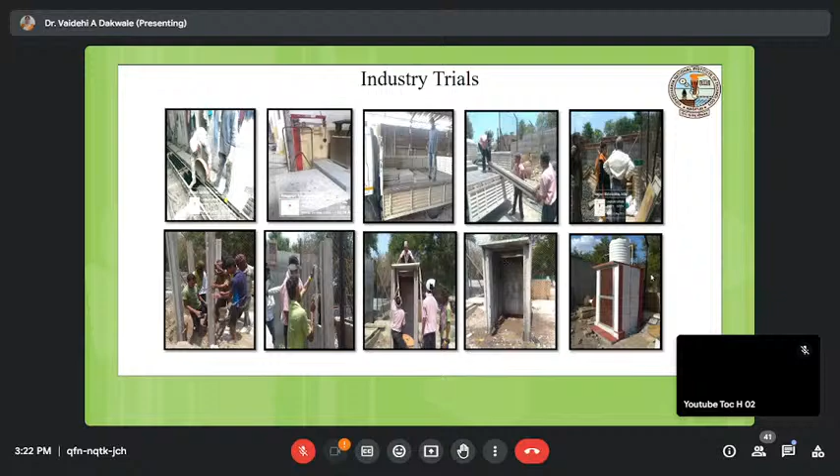The next is to make such a material which is very low on the operational energy, or a combination of material which is low on operation energy. For example, if embodied energy is more, but I can make a thermal insulating material which requires lesser cooling energy, then the operational energy of that material will be lesser, so total life cycle energy will in turn reduce.

In this particular project, there were doubly glazed windows manufactured using the concept of double glazing and the cavity for insulation. The windows were constructed so that one pane of glass had UV rejection film on it, and another pane was plain. Because in summer season you require radiation cut off at the outside, and in winter season you require the cut off from inside to outside. So the windows were able to rotate with respect to what type of cutoff you require.

As you can see in this building model, there is a model which was constructed for this experiment, where we achieved good thermal insulation inside the building by using the double glazing windows. The glass used in this project was a normal commercial glass available in the market; only the construction method of the window was slightly modified.

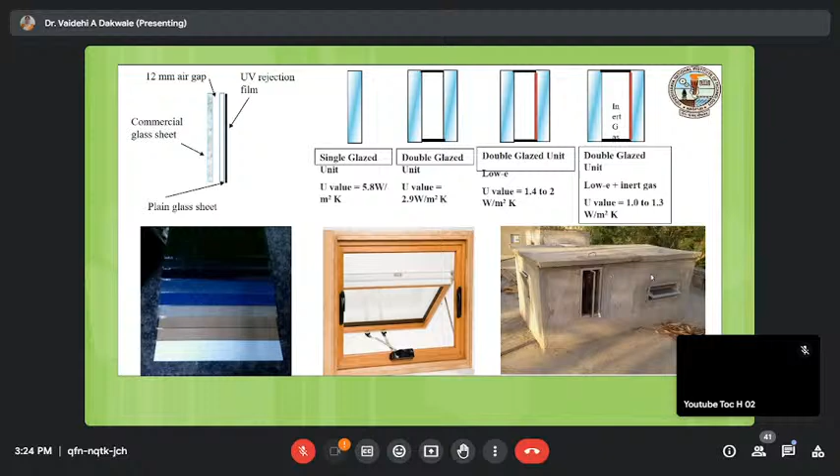For comparison of this particular technology of construction demolition waste bricks and windows, two models were compared. Model M1 had fly ash bricks and normal glass windows, and Model M2 had construction demolition waste bricks, an insulating material on the roof, and windows with double glazing units.

While comparing this, temperatures were recorded for a complete year inside this built environment, and it was found that we can achieve a delta reduction in temperature using the double glazed windows, the roof, as well as the bricks. The same results were simulated on TRNSYS and were validated by experimental recordings as well.

I want to point out that if you are using RCA, you are putting extra energy to process it, because when you demolish a building, bigger boulders of RCA or concrete are available. You cannot use them as is, only when dumping them somewhere, which is a non-sustainable type of disposal. So if you want to use it, you will have to crush it, and crushing it means giving energy to that process. This makes our demolition waste aggregate a more energy intensive material.

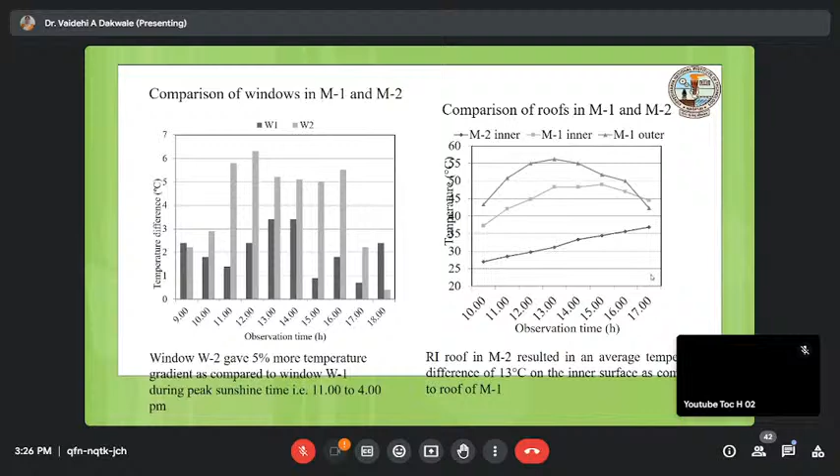Can you suggest me more methods on this, or any doubt so far? No doubt? Okay, then I will ask you the doubts. I hope you are listening to me.

Ma'am, I have one doubt. Actually, if I'm using artificial aggregates, I can't just consider it as sustainable just because I'm making the aggregate from waste, right? I cannot just say it is sustainable. So it depends upon the process or the energy consumption and all, right? Yes, correct.

So how will you justify that when you are using the artificial aggregate, it is sustainable? That is what I want you to ask me, because I have been posing this question since the start. That is what, see, when I was asked to present this particular topic, I could have put all those sustainable materials which are available outside on the slides.

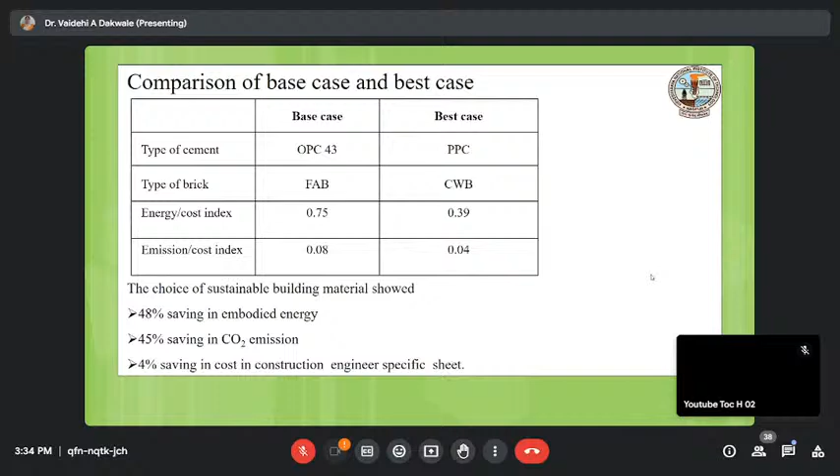This is what the result sheet is. This is how you do the calculation in that tool, and this is the result sheet. We calculated the energy cost index and emission cost index. Cost sustainability is the major point in any material; you are supposed to achieve it.

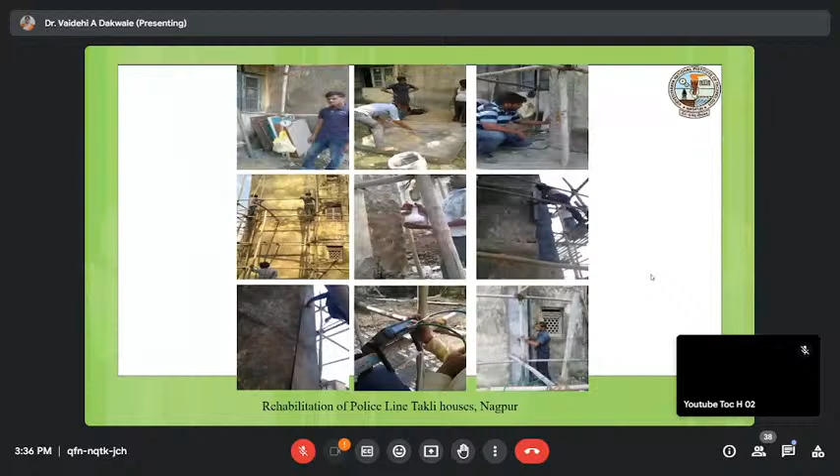These are the case studies which we did for that particular project, where you can see a column, a distressed column, and in the last photograph the mortar or plaster used for this column restoration has 0.5% polymer latex and 7% metakaolin, and it gave the same good result as the earlier industrial mix. These are the results. So herein we achieved process sustainability.

So I will wind it up now. The conclusion: if someone asks me what is the definition of a sustainable construction material, I will not take the name of any material which appears to me as a sustainable material. The material will be sustainable only when there is material durability through the process of reuse. If you are using a low energy material in manufacturing one building unit, say a brick, but it does not have recycling potential, it means it has lost its material durability or sustainability at the end of the life cycle. So material durability through the process of reuse means you should be able to put that material at the end of its life into reuse again, or recycle it.

In that term, cement happens to be the most non-sustainable construction material, in my opinion. You can make it sustainable only when you change its raw material completely, because you cannot recycle it at the end. You can call your cement sustainable if you are using fly ash as a replacement to cement while manufacturing it, or using the cement to make a very long durable type of component.